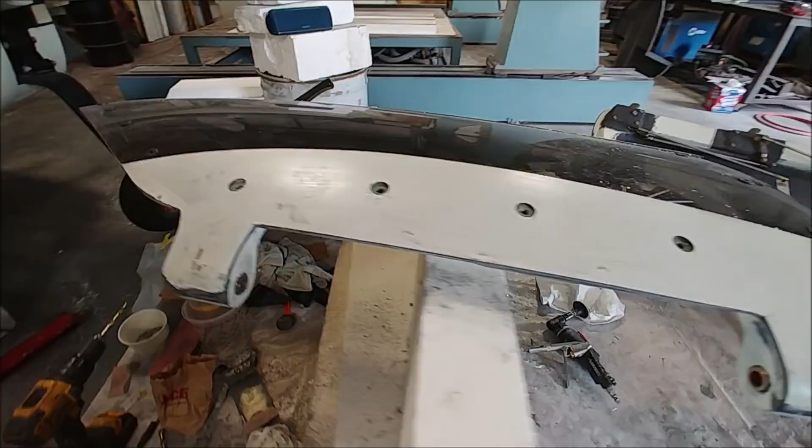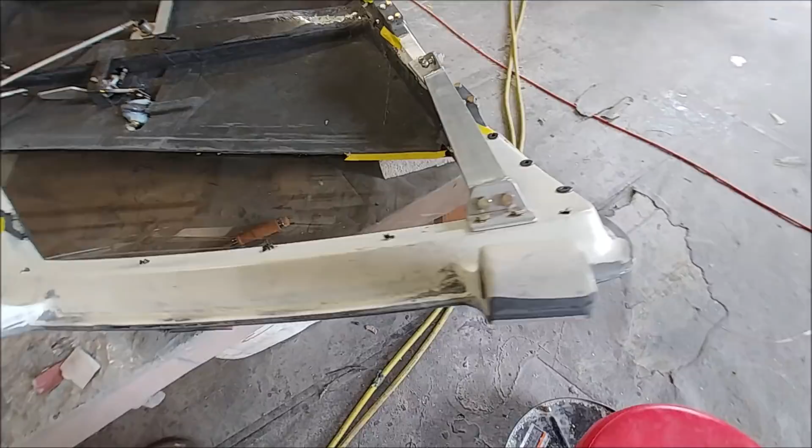Welcome back. So last time I was bonding the skins onto the upper part of the doors. So as you can see now, I've taken the clamps off and that came out pretty well. So I spent quite a lot of the time on Tuesday sanding around the edges there and just cleaning up the skins and getting it all sorted out along the edges of the windows as well.

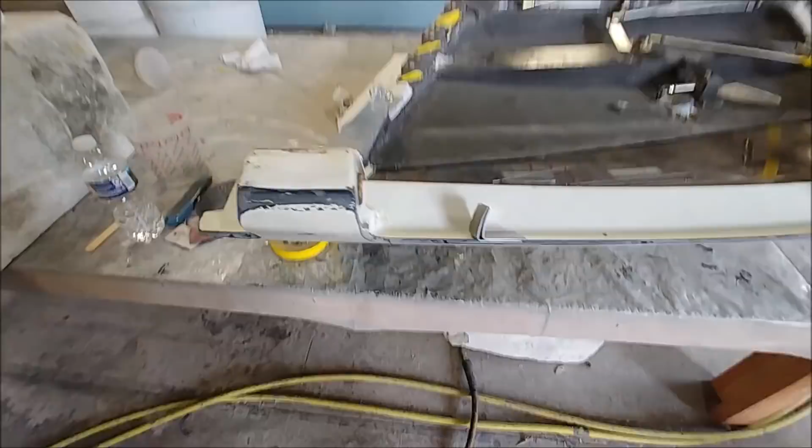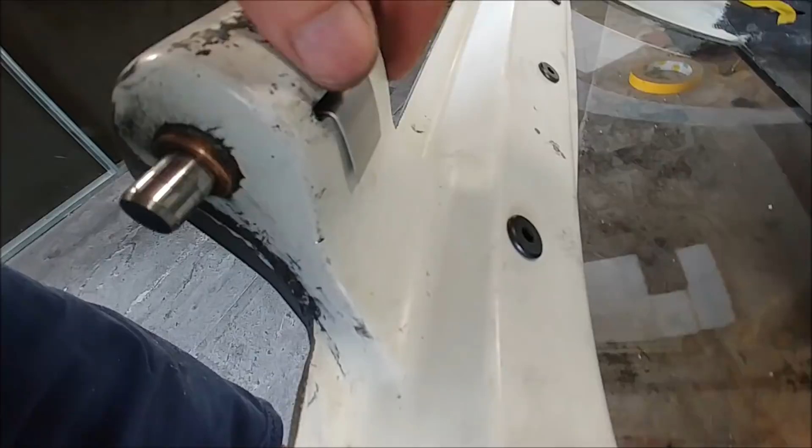And also bolting those fasteners in, the 5 fasteners in the top there. They're going to be covered over. And so as you can see, those are in on both the doors. And now I also created these little brackets, I guess you want to call them, and they hold the pins there in the door, the hinge pins, and stop them from sliding back inward once they've been slid into the pin receivers inside the fuselage. And they're going to get at least one little screw there to hold them in, probably just a little flat-headed screw to hold that thing in place so those pins can't work their way backward out.

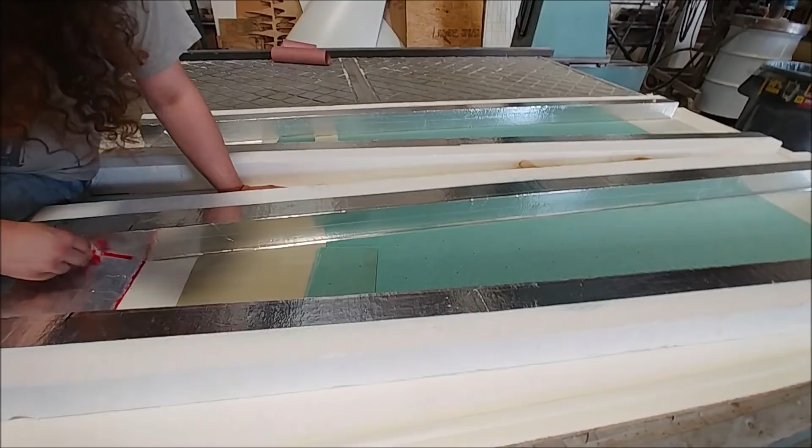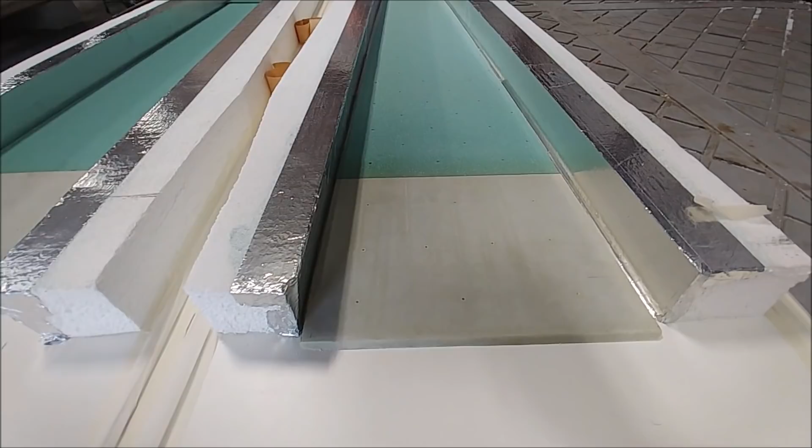And meanwhile, Devon and Jeff have been working on getting these temporary molds prepped up for those inserts for the spars. And you can see Devon's just got a bit of clay there and just sealing up the edge of where that sort of wedge is there at the end. And as you can see, the core pieces are cut there. There's some FR4 for where the hard points bolt through, and also just some regular foam, 1/4 inch.

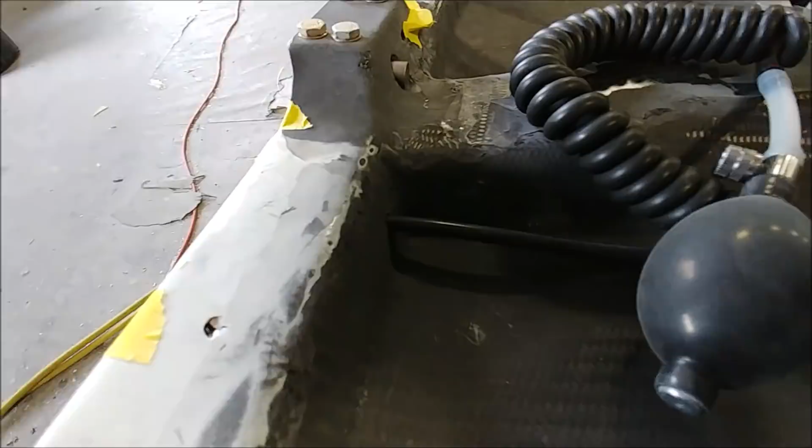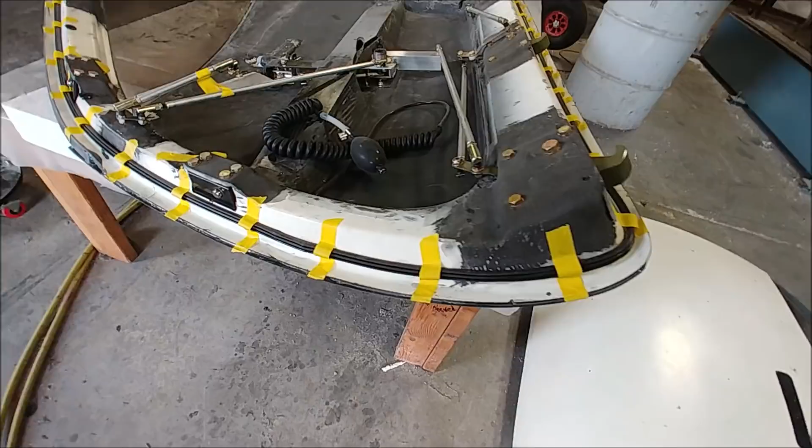And my next step was to temporarily put the inflatable seals around the outside of the door. And you see I've already done this one and drilled a hole there through the frame so I could pass the feed tube where it inflates through that tube with the little blood pressure type bulb thing that I've got there. And I'm just using some tape to hold it in place right now because I want to be able to remove it later on for when we go to paint the inside frame of the door.

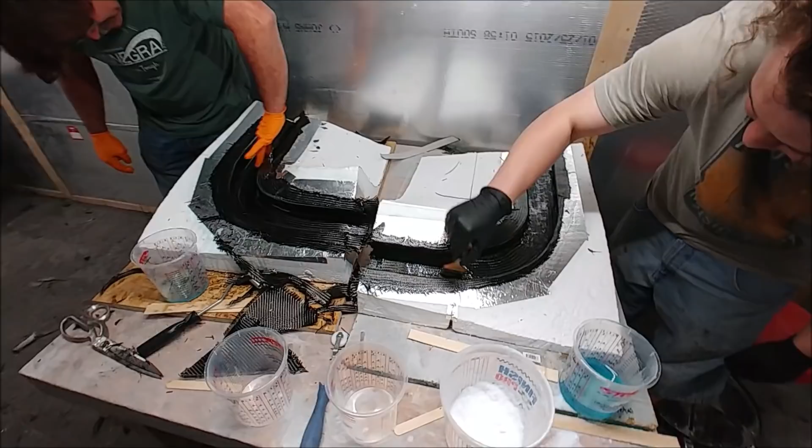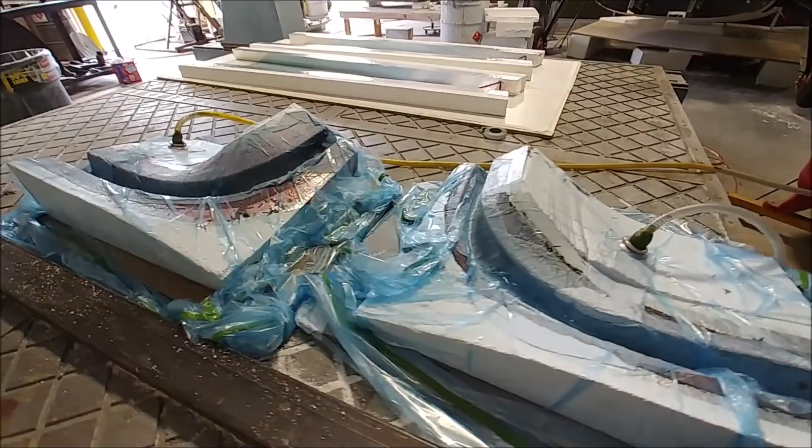And now we're on to Wednesday today, and Jeff and Devon are laying up the first of those closeouts. These are the ones that are in the radius there for the spar in those temporary molds, so not too complicated to get those underway. And it didn't take them that long, and they had them under vacuum there, as you can see, and they moved them out onto our main work table for the CNCs, so the vacuum tank could be out there in preparation for vacuuming the other ones that you can see sitting just behind them.

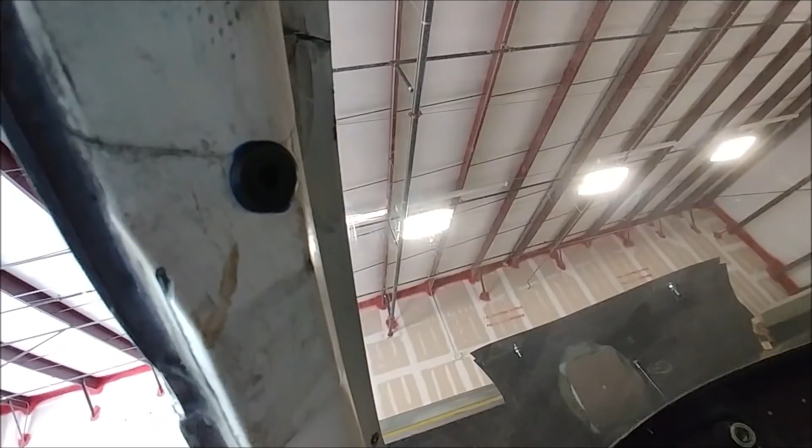And along the lines of getting the cabin all sealed up, just using some silicone there on those fasteners for the A pillars and the B pillars, and just sealing those up. And I've also done the ones on the doors as well, so they'll be pressure tight when we go to pressurize the cabin.

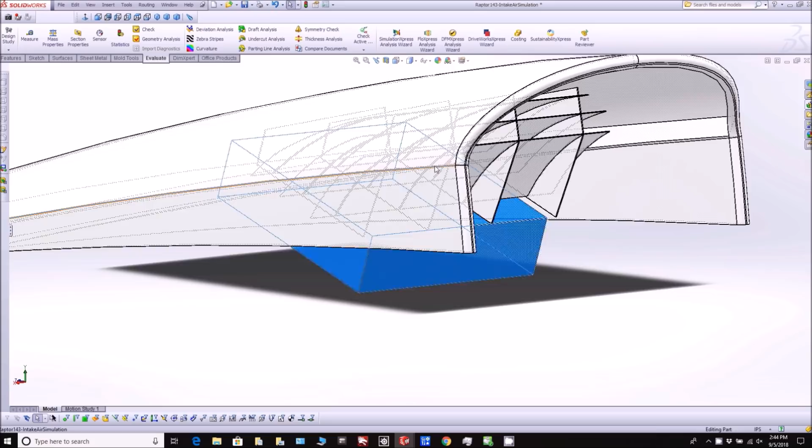And over the weekend I worked on finishing off the design for these inlet vanes that help direct the air into the intercooler and the radiator. So as you can see, they're highlighted in blue. That's the intercooler, and right below it would be the radiator, and obviously the scoop is on the top there. And the vanes, their job is to basically just allow the air to curve around and go through the intercooler.

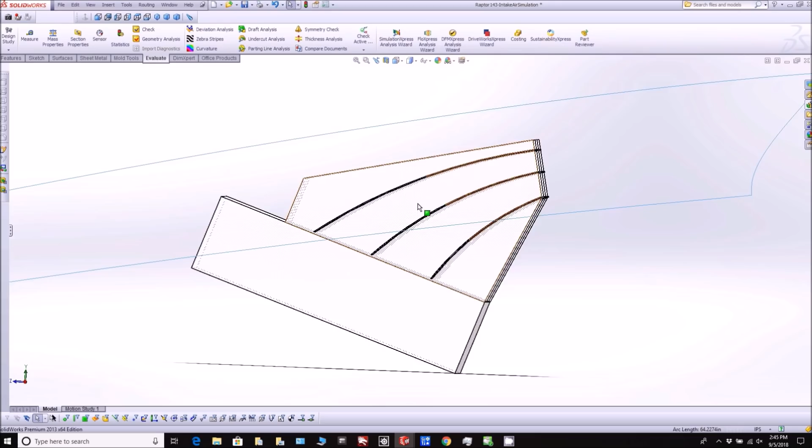So where I'm drawing the mouse there, that's kind of where the roof line is. The sides of that intake normally are sort of hidden when it's down and exposed when it's up. Anyway, if I hide that, you'll see the air will come down in through the intake there and go in through the different areas of the vanes, actually 4 different sections. And this just helps direct air to the bottom part of the intercooler.

And I did the flow in SolidWorks a while back, and we needed to have this, otherwise all the air just goes to the back and you don't get much cooling in the front of the intercooler.

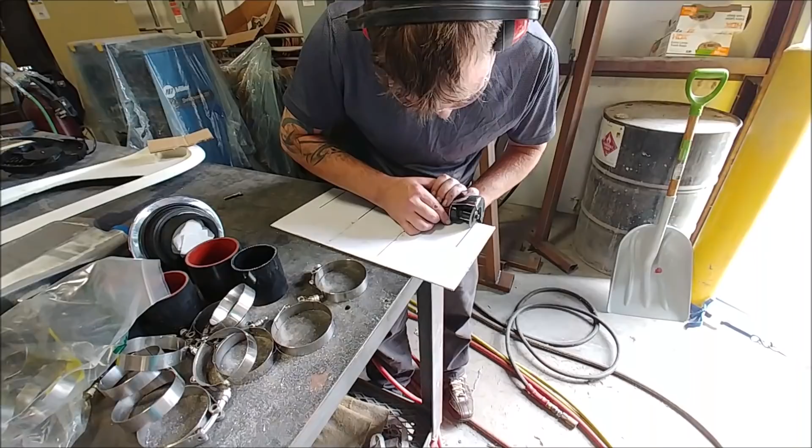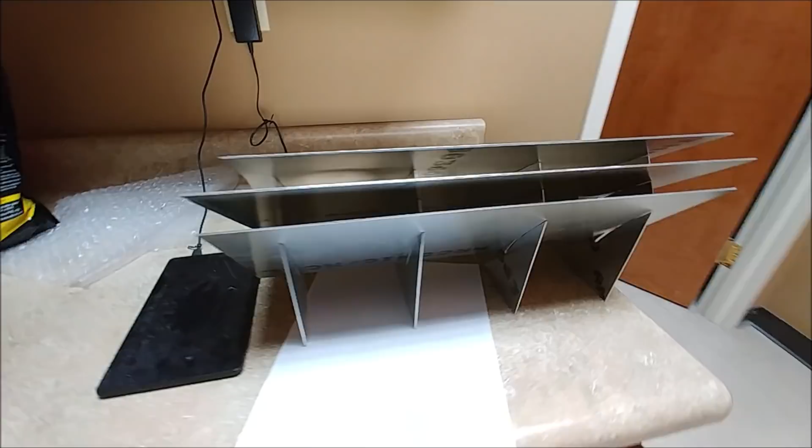And so here's Dan. I printed out the templates and stuff for him, and he's just been cutting those out on the bandsaw. And then this one, you need to do it by hand in order to get it cut there, because it wouldn't fit under the bandsaw. But anyway, here he's got it basically done here, all the pieces put together.

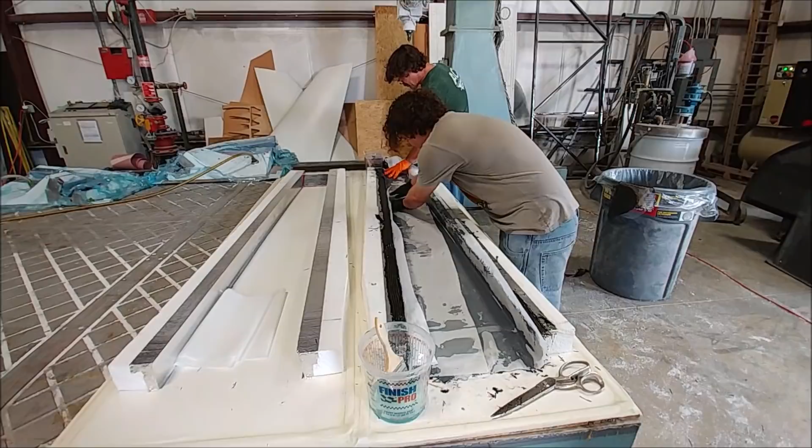And so I have to go up to Brits now and curve those flat bits and then have him tack it together. And meanwhile, there's Jeff and Devon getting underway with laying up these larger closeouts there for the wing spars. And now I'm on to the other door and putting the door seal around there.

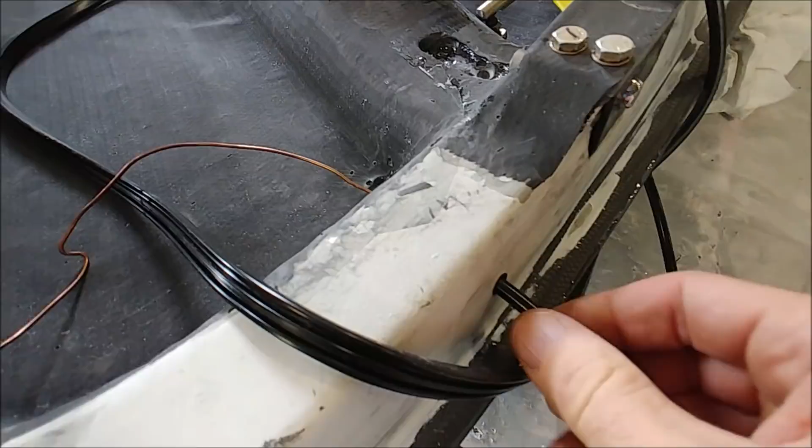So as you can see, I've drilled the hole there through the frame and come out the other side, and I've just run a bit of welding wire through there to help fish that tube through. So I just basically push it back through there, and it's a bit hard to do it with one hand, so there it is after I put the camera down, coming out the other side. And now I can pull it all the way through and start laying out the actual seal around the frame.

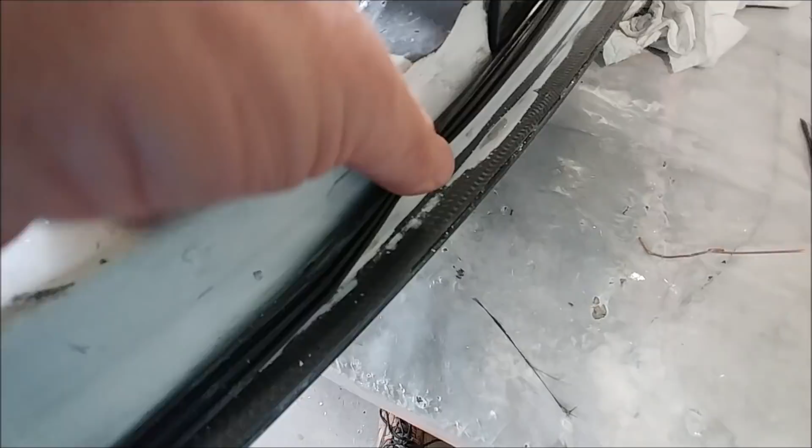So not really that difficult to do. And then that actually seals pretty well there. That tube's a snug fit through the hole, but I may have to put some silicone in there as well just to prevent any sort of air leaking back through into that frame, because the frame is hollow, but it's on the cabin side, so it's under cabin pressure.

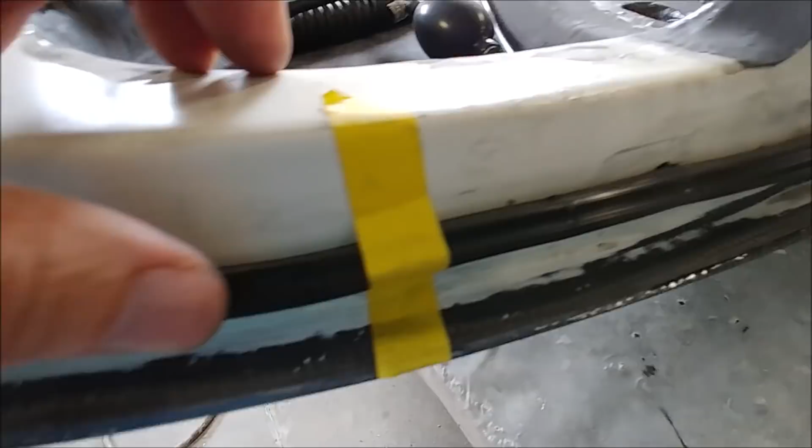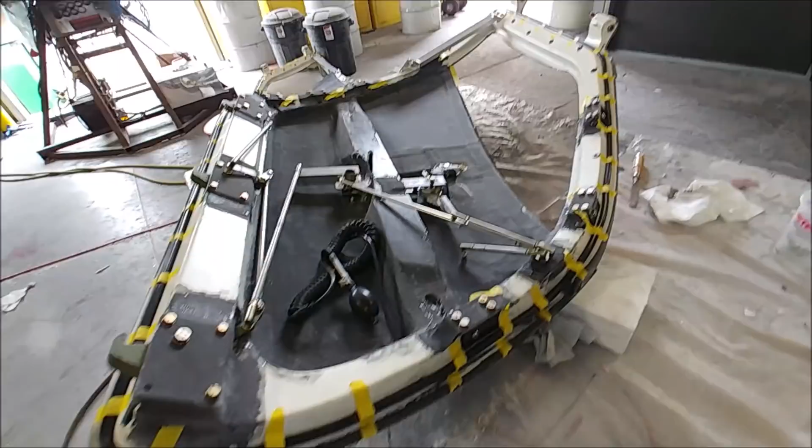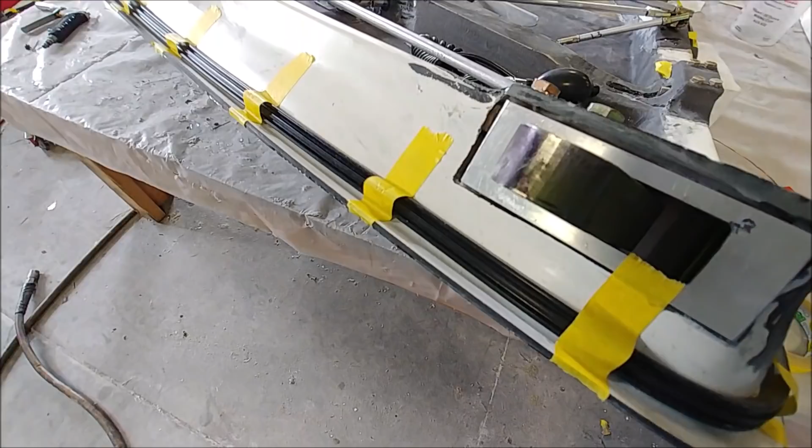So there, I got it all done, and I'm just starting to tape it down. So I inflate the seal first, and then just put the tape around it to hold it in place, and then you just deflate it again, and the tape's sort of loose around the seal. But as you can see, now I've got it all done, and so that door is ready to go on there, and I can take the pressure off the seal again now. So as I said, later on we'll actually bond those seals on with adhesive once we've painted the inside frames again.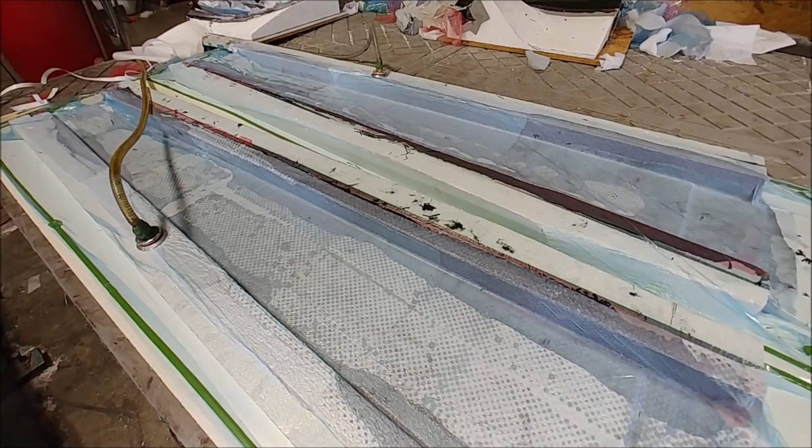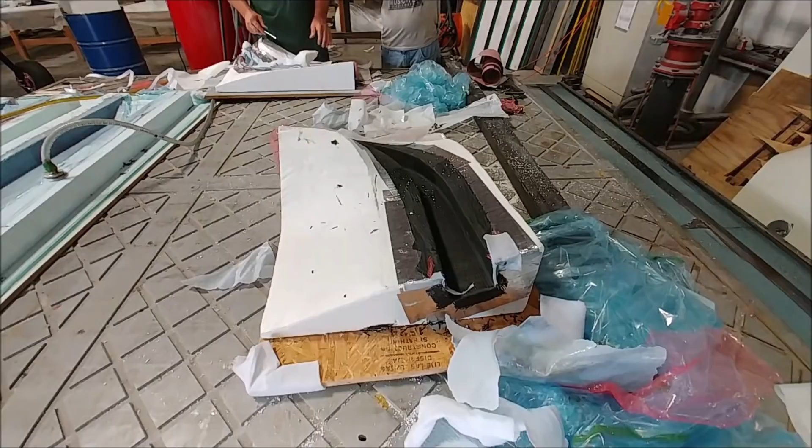And Jeff and Devon got those two parts laid up there by the end of the day, so they did all 4 of them today. So tomorrow those can come out and probably get trimmed off and get fitted into the spar. So we'll be actually taking down the cool room and starting to set up one of the wing fixtures, so we can start putting the wings together.

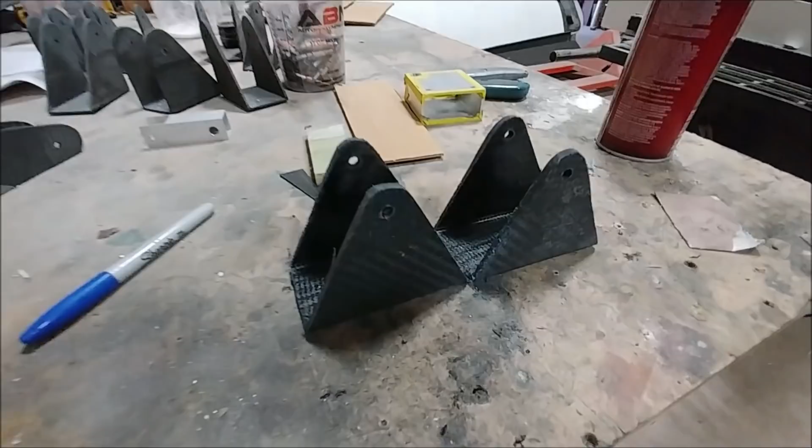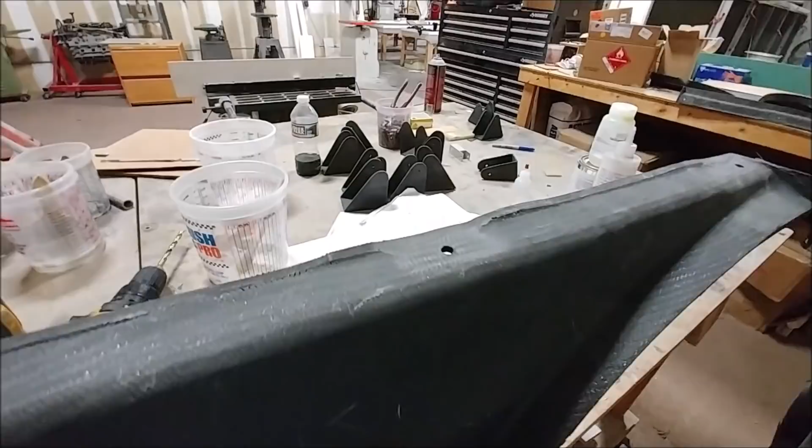That's pretty exciting. And they've taken all the bag and everything off these ones and let them cure up. And Dan cut these out of that stock that Jeff and Devon laid up the other week. So those are for the elevator controls, the rudder controls out in the rudder, and he's in the process of drilling the holes there to mount the seats for the rear seats, because now those rear seat mounts are done, as you can see, and he's done one side and he's just got to do the other sets.

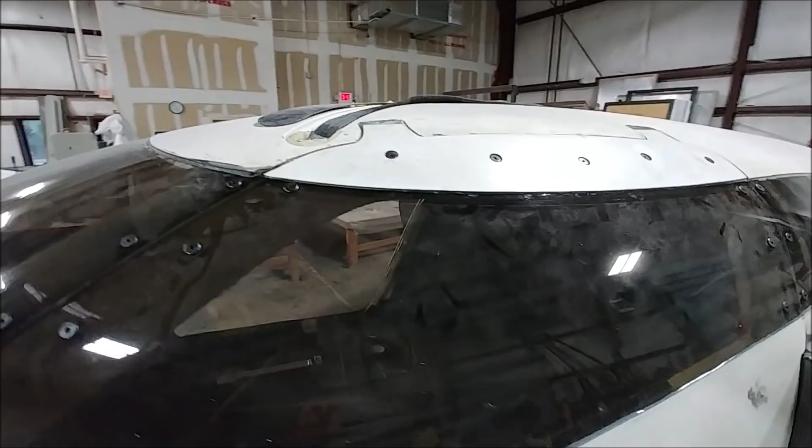And lastly, I got the first door on with Dan's help, and now the job that remains is to get all the pins actuated nicely and the linkages hooked up, and then we can get pretty close to actually getting ready to pressurize the cabin. So that's exciting. So anyway, that's our update for the first half of this week.